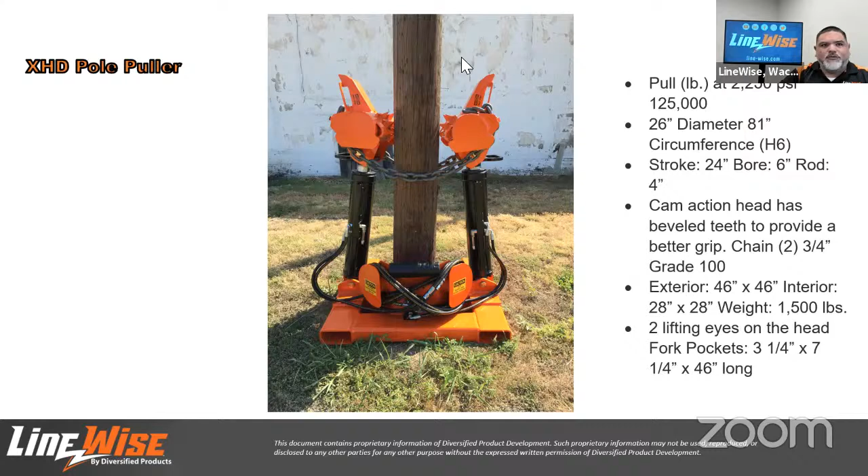High capacity pulling poles up to 26 inches in diameter. The XHD pole puller can handle a class H6 95-foot pole.

So we talked about the heads rotating in. We call them cam action heads. Essentially what happens, going back to the previous slide here, as this cylinder extends on each side, it's going to want to cause the heads to rotate in. As that happens, the chain gets tighter, which causes the heads to bite harder into the pole and not allowing the pole puller to lose grip on the pole as it's pulling it out of the ground.

There are some teeth that are in the pole puller head here. You can kind of see them sticking out more in this picture here, and a little bit right here. These teeth will bite into the pole as the heads are rolling over.

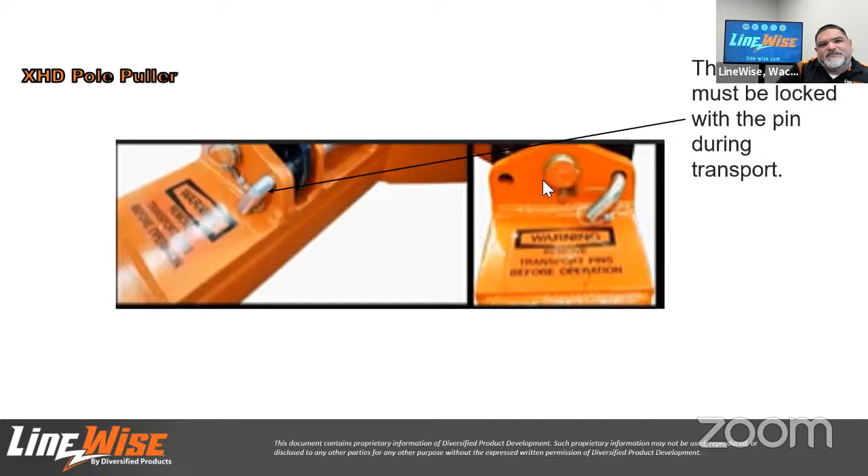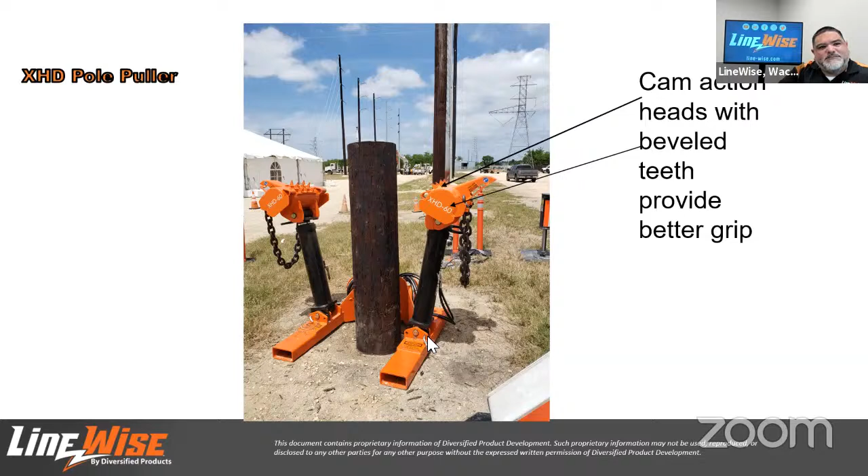The cylinders must be locked with the pin during transport. You can put this on the deck of a crane, you can put it on a trailer. I've carried both sizes in the back of my pickup. But you've got some cylinder pins here at the bottom that you put in place to keep these cylinders from rocking back and forth. Imagine if you didn't have these pins in place and you're going down the road and you hit a bump, or even down the right of way, these cylinders are going to want to swing back and forth. So this is why you put this pin in for transport purposes. Now this position right here is more of when it's being positioned around the pole. In transport mode, we'll see a picture of that later. This pin would be in this hole over here, or the inside hole.

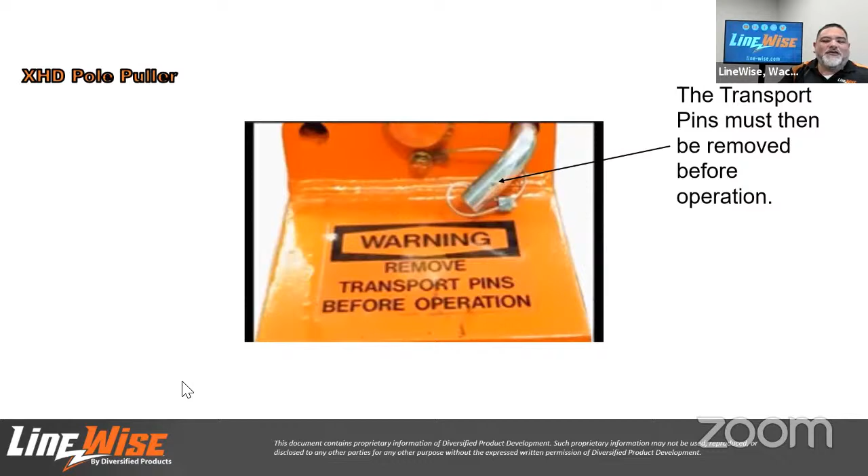This is here just showing you the warning to remove transport pins before operation. I've been around the pole puller quite a bit, and I was on a demo about two weeks ago, and standing there right before we started pulling the pole, I made it look like I knew that I had to remove the pin, but the pin was still in place. So that pin does have to be removed before you start trying to pull the pole. And that's what this decal here is trying to explain.

This is more of your transport mode here. Now the cylinders are rotated in towards each other. What you want to do here, as I mentioned yesterday in the webinar we did, is we could sell an outrigger pad that goes in the center of this to keep these heads from beating up against each other, or you could put a piece of plywood or something of the same material in between, so that as you're driving down the road, these heads don't beat back and forth against each other. Another thing you could do is rotate the heads back and then strap them away from each other. But whatever you can do to keep them from beating up against each other, that's going to help protect the heads of this pole puller.

One thing I just noticed right here, this black canister right here is the manual container. So if you order one of these pole pullers, you'll be able to find the manual for the pole puller inside that container there, strapped to the base of the pole puller.

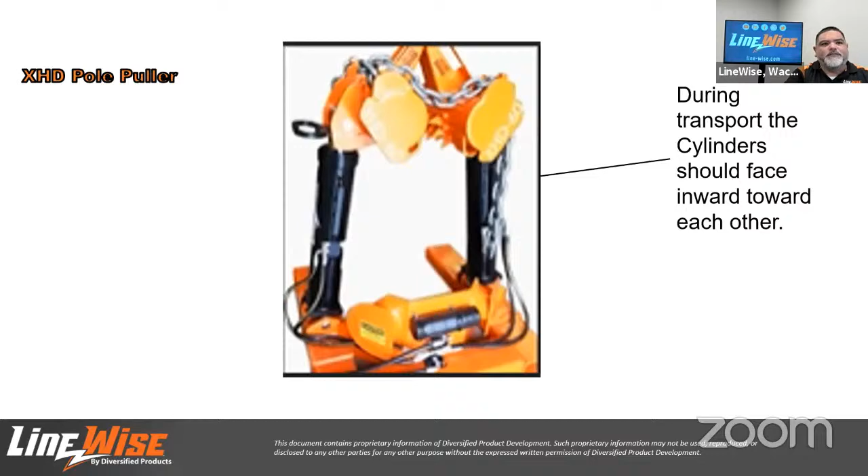Here's an example, this was actually an HD in this picture here. We said it's XHD here, but it really was an HD pole puller in this picture. This is on the deck of a line truck, digger derrick, as some people call it. You can transport them on the deck of the digger derrick and then use the load line to offload it and put it next to the pole.

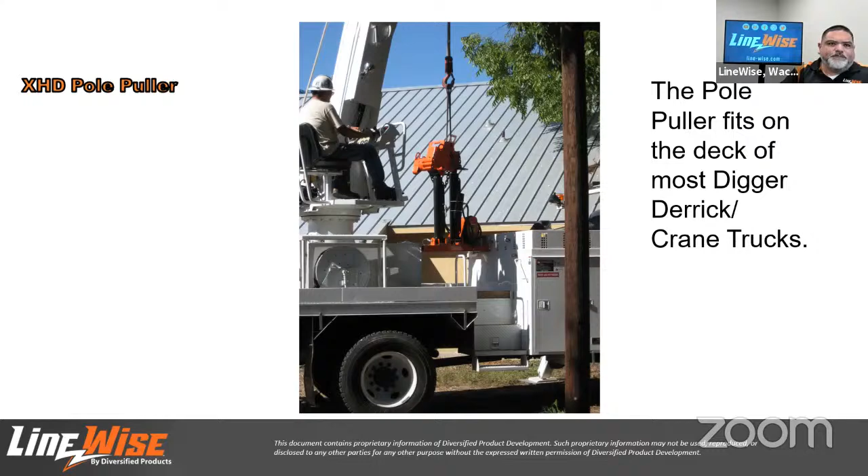Here you can see the lineman is positioning the pole puller so that the pole will end up between these fork pockets here on the bottom. Again, just because it has fork pockets doesn't mean it can't be lifted by the load line on the crane or digger derrick as we're doing here. But you can also use a skid steer. That's why we have the fork pockets at the bottom.

There's 25 feet of hose, I believe it is, on the pole pullers. So that you can use this extra length in addition to any length that's on the reel on the hoses on your digger derrick or your skid steer to be able to attach to that tool circuit.

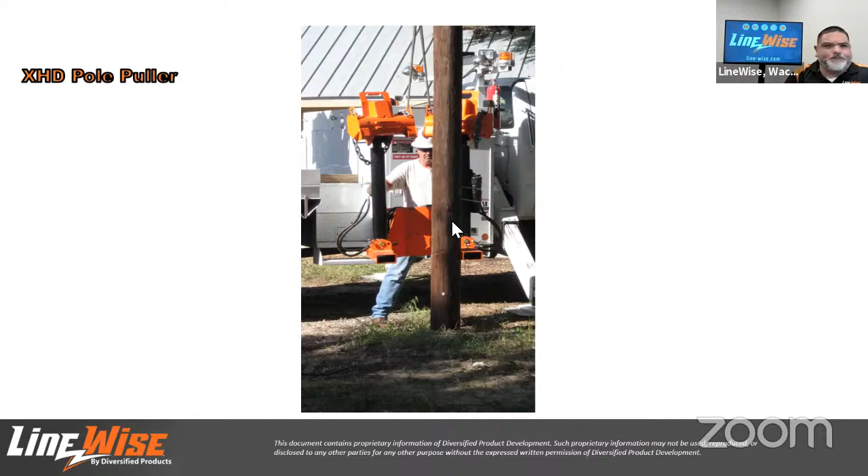Here you can see now the pole puller is now positioned in place with the pole in the center of the fork pockets on the bottom. Notice the chains have not been attached to the head on the opposite side as of yet. The chains are just hanging there.

We wanted to point out, as mentioned earlier when the video was showing, the base of the pole puller is much wider. You have a lot wider base to set on the ground. It's not just a single point of contact like a single cylinder. The single cylinder is going to have a much smaller footprint and it's going to want to dig into the ground, as we'll see in the video here a little bit later. But with the wide base of the pole puller on all three models I mentioned at the beginning of this PowerPoint, they have a much better chance of pulling the pole out because it has more ground force to push against.

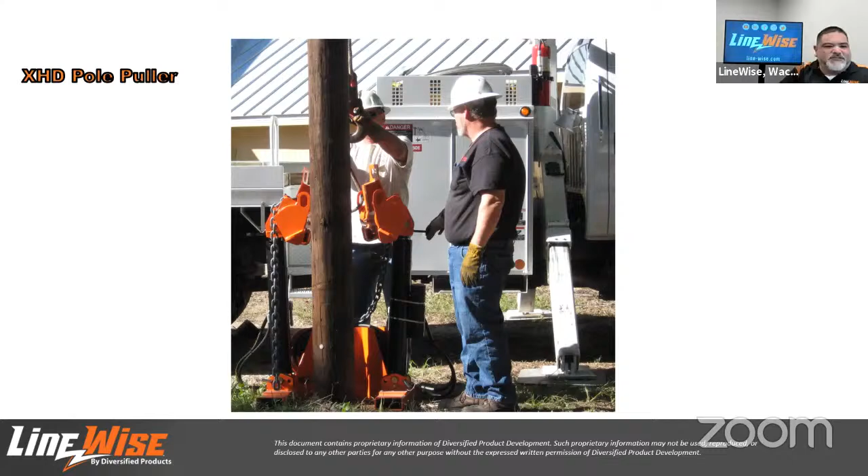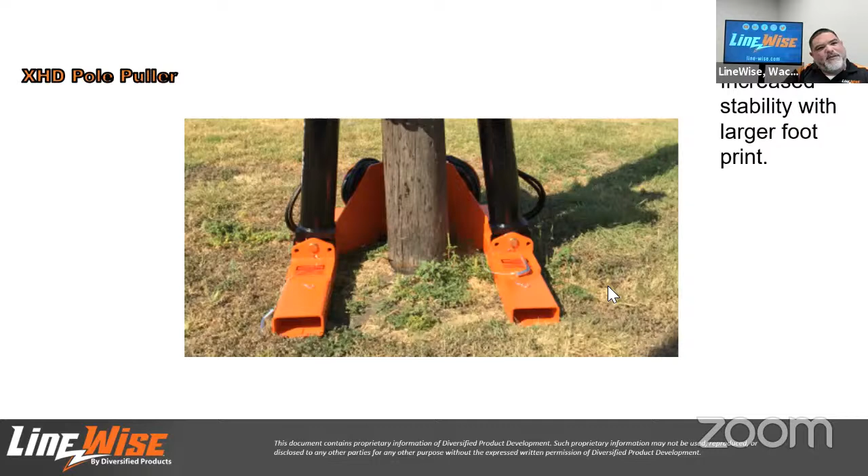So that's what this is showing here, more clarity that it is a wider base. Some people have asked, what if you're on an incline? It still works the same. Dave Packabush and I were out on a demo some months ago, maybe over a year ago at this point, and I remember we were on somewhat of an incline, and what they did was put some cribbing underneath one side of the pole puller, and it worked just fine.

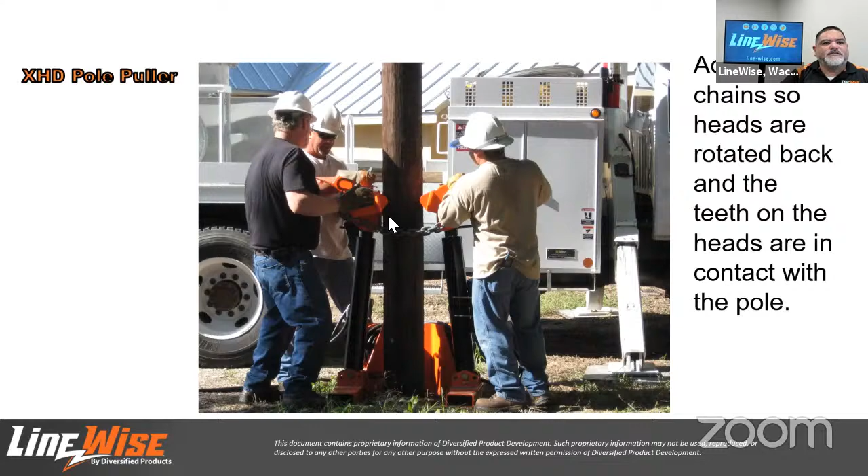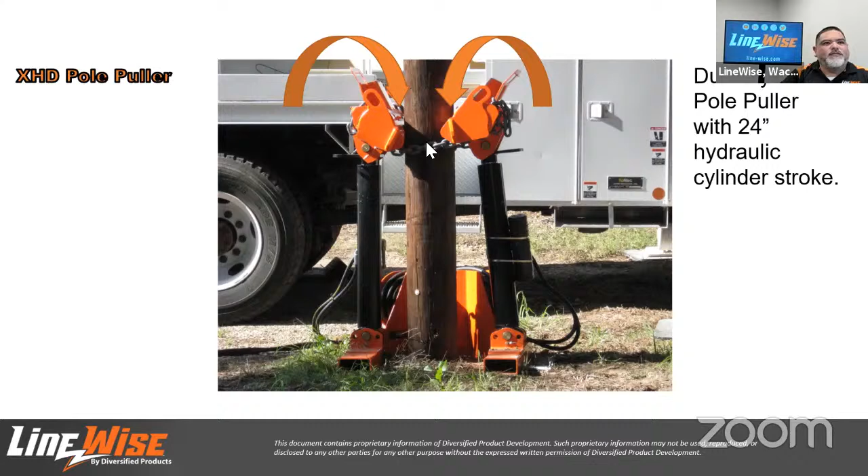Notice there's no pins in the hose down below, as previously stated. Here, this is just reiterating that the heads are rotating in. Notice that there's no slack whatsoever in the chains now, that the cylinders have started to extend and the heads began to roll. The slack was removed from the chain.

Here again the cylinders continue to extend. Notice that one of the cylinder rods is out further than the other. Some people, when using it, have asked, well, is that a problem, or why don't they extend the same? The reason is because there's no equalizing valve, or whatever the correct term is, to keep them coming out the same. Really, quite honestly, there's no need for it. Once the chain tightens up and these heads are biting into the pole, it doesn't matter how much this cylinder is out versus this one. Now the grip of the heads on the pole is what makes the difference. As this head goes up, it's going to pull this one along with it. So there's really no need to do that.

On a couple of occasions where customers are just adamant about the cylinders being the same, we did some special stuff there, but why pay the extra money when it's still going to work the same?

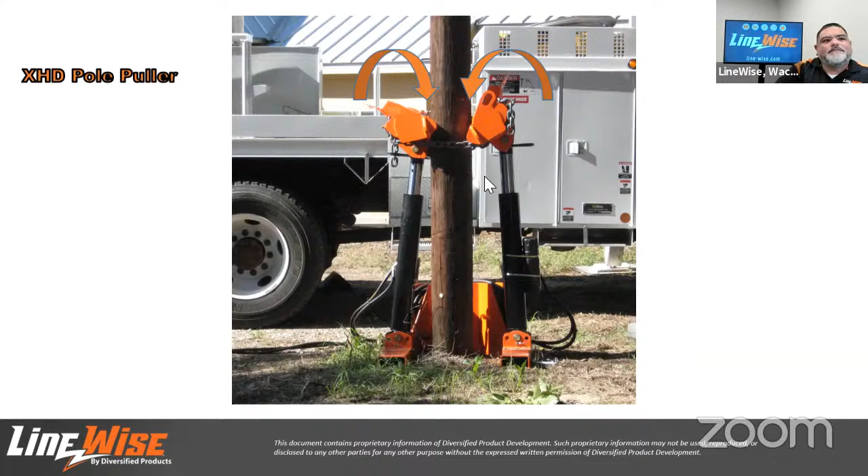Here you can see the cylinders fully extended at this point. Notice how, again, the cylinder on the right is out further than the left, but it still pulled the pole out of the ground.

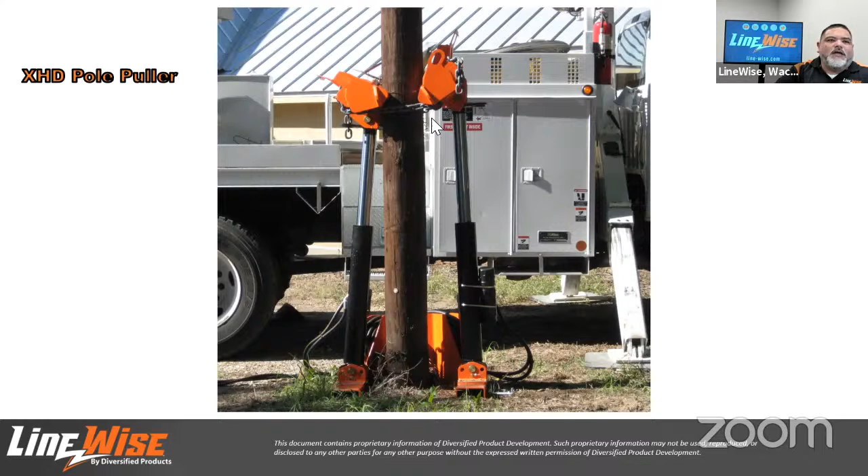At this point you can see the pole is completely removed. One of the things I didn't get to in the video today was that it shows the pole comes straight out of the ground. There's no moving the pole back and forth, making the hole in the ground bigger than what it needs to be. At one particular utility I was at, they said they really like that feature because it allows them to reuse the hole the old pole came out of. Sometimes they're pulling the poles just to put a taller pole in there, or maybe something else is wrong at the top of the pole, but they want to try to reuse that same hole rather than dig another hole.

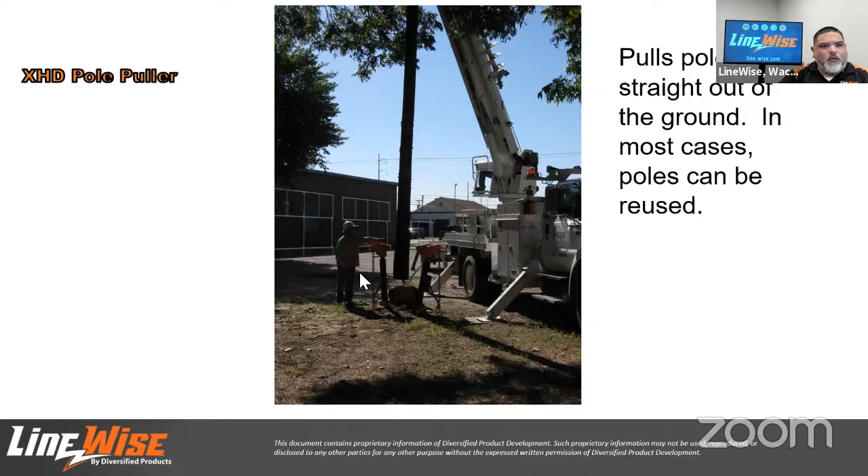So anyhow, that's showing it completely removed. The cylinder's retracted now and rolled back so that they can pull the pole out of the ground. Oh, where's that picture right here? It shows a clean hole here where the pole came out. This is a screenshot off of that video that we started off with today.

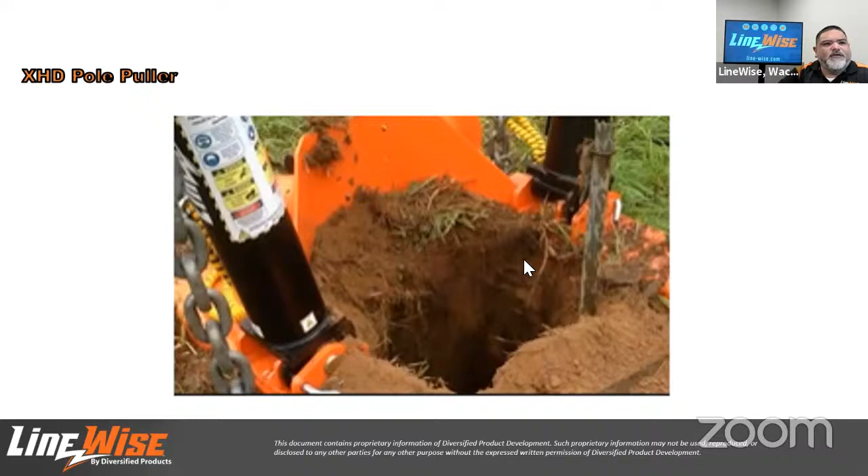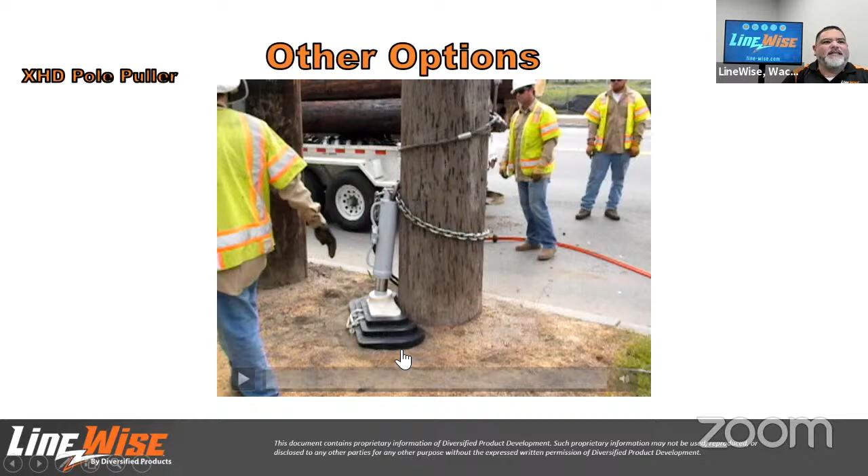Now here we have a video that we want to share. This is an example of a single cylinder pole puller working. This was somewhat of a modified version. I didn't mention this yesterday, but in general it still works the same way. The difference here is this particular company, a guy that worked there, came up with this extra base on here to have more ground to push against rather than just your basic foot plate for your single cylinder pole pullers. And this one here still has the same problems that your single cylinder is going to have.

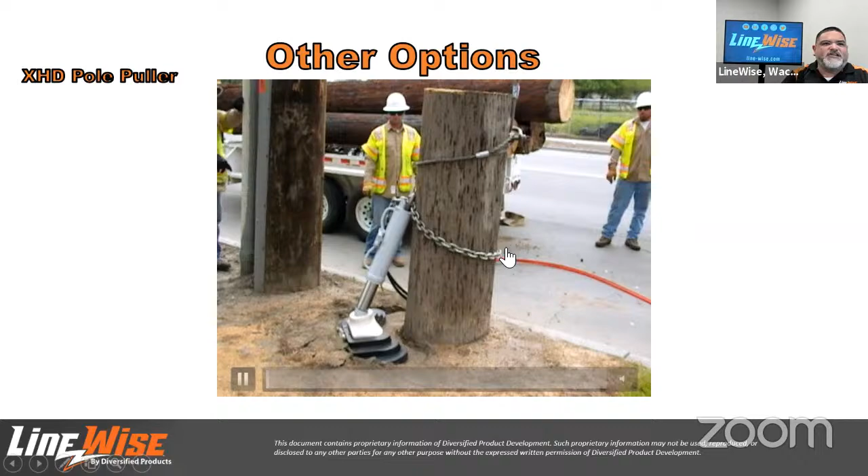So you can see here that in this version, like all other pole pullers, they used a chain to try to pull the pole out of the ground using the cylinder. Notice what happened is that it pushed away from the pole.

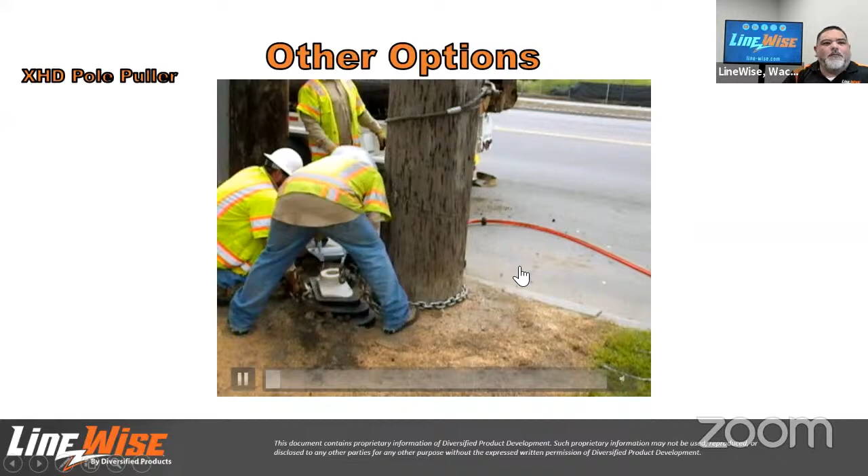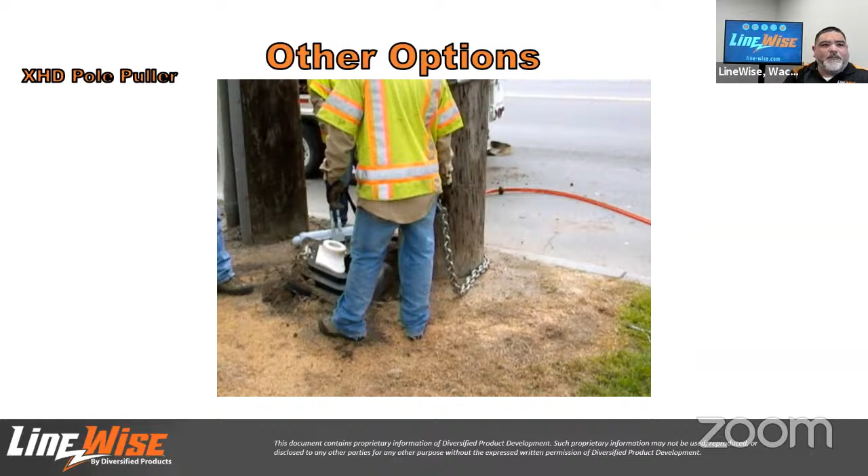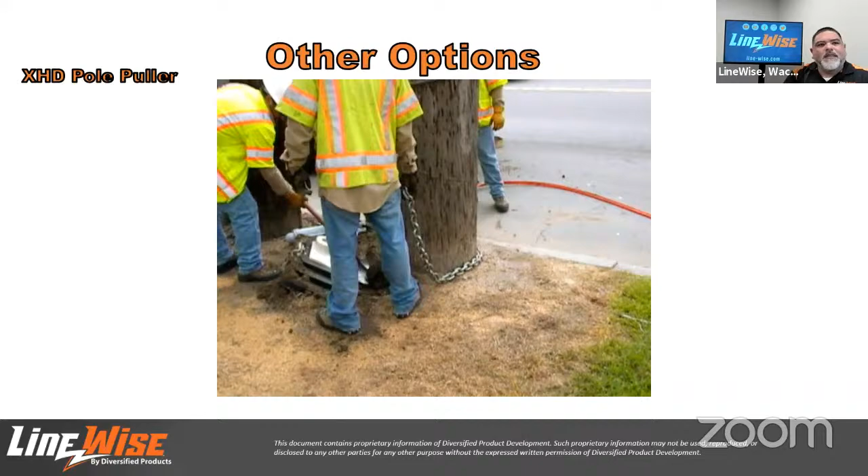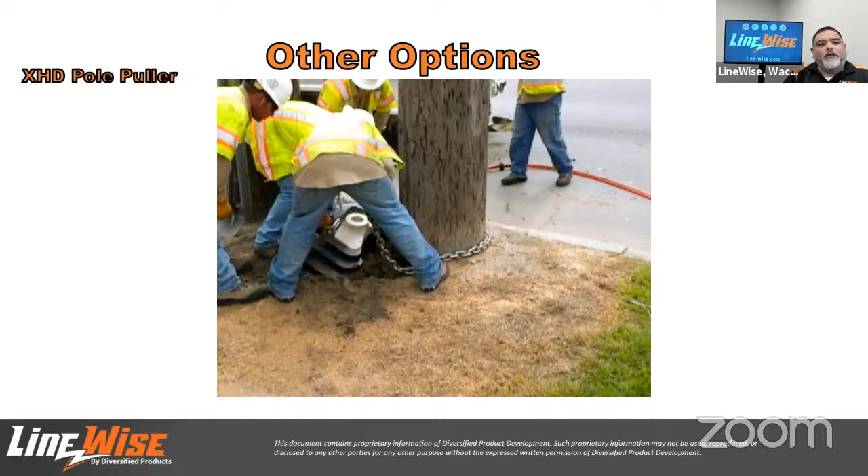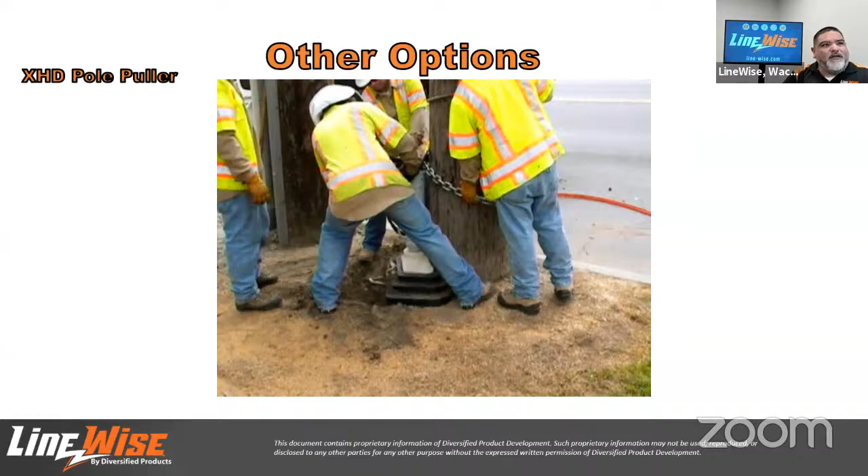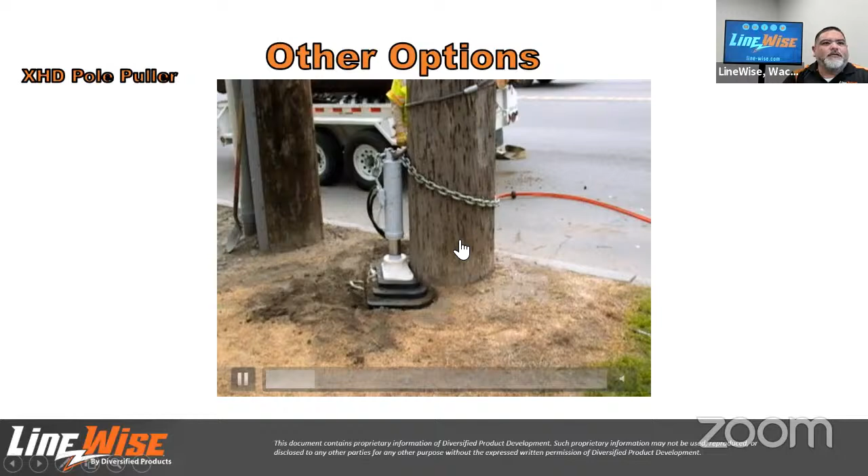There's a lot of reasons why people want to go with the single cylinder pole puller. Number one, price is one of the number one factors. For less than $1,000, is my understanding. I don't sell those single cylinder pole pullers, but it's my understanding they cost less than $1,000, and ours is going to be 17, 18 times that amount on the XHD. That's one of the biggest differences. But look at everything you're going to go through with the single cylinder versus the LineWise XHD pole puller. We'll cover that more later.

In this case, look at how this single cylinder is now pushing into the ground. Dave Packabush brought to our attention yesterday that what it's doing is compacting the ground around it even more, making it harder to pull the pole out. So it's working against itself.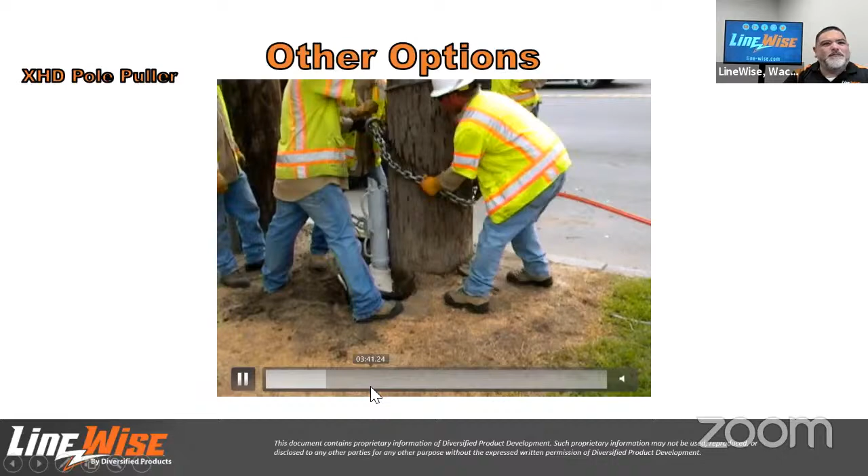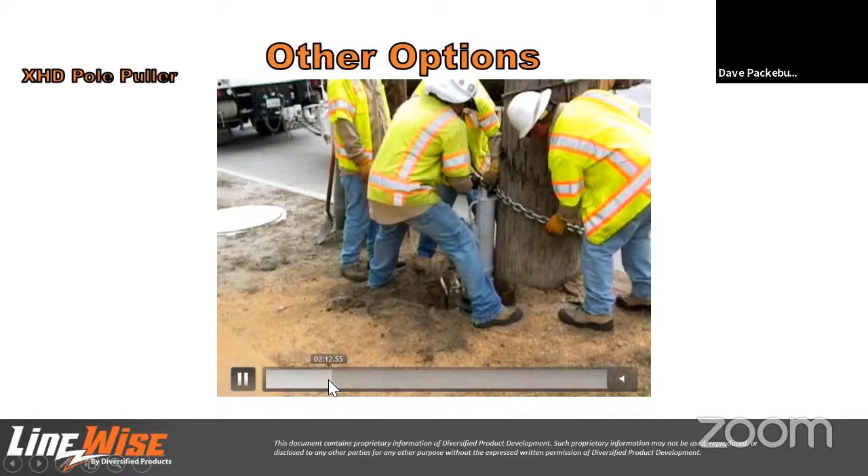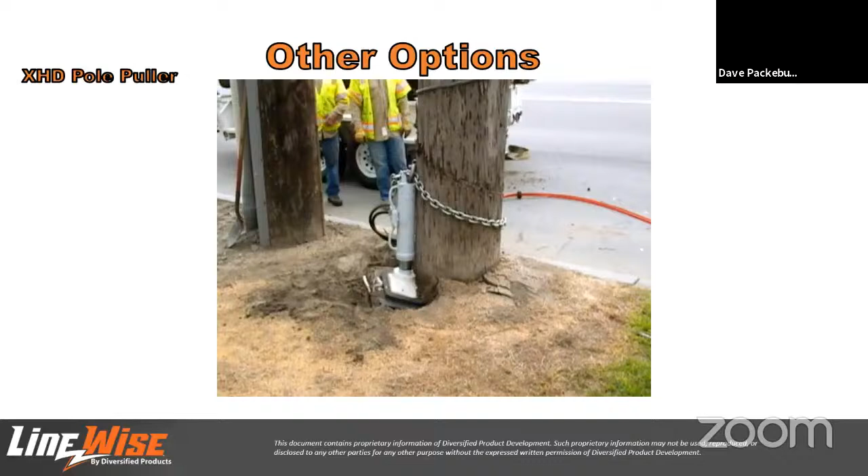Dave, anything else you want to mention about this single cylinder pole puller? The weight of having to move this thing around - the single cylinder is probably over 70 pounds, I know it's over 70 pounds. So you're trying to move this thing around, get it up to the pole, get it all positioned. If you're looking for hurt backs or on-the-job injuries, this is one of the ways to do it, with these single cylinder pullers.

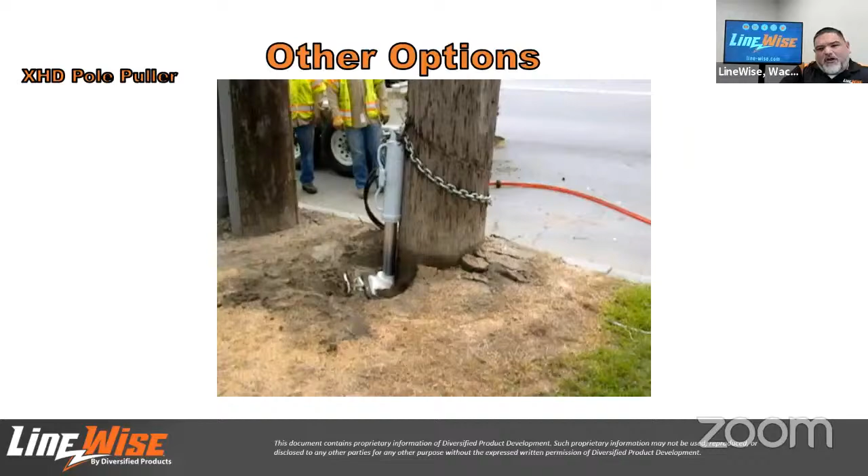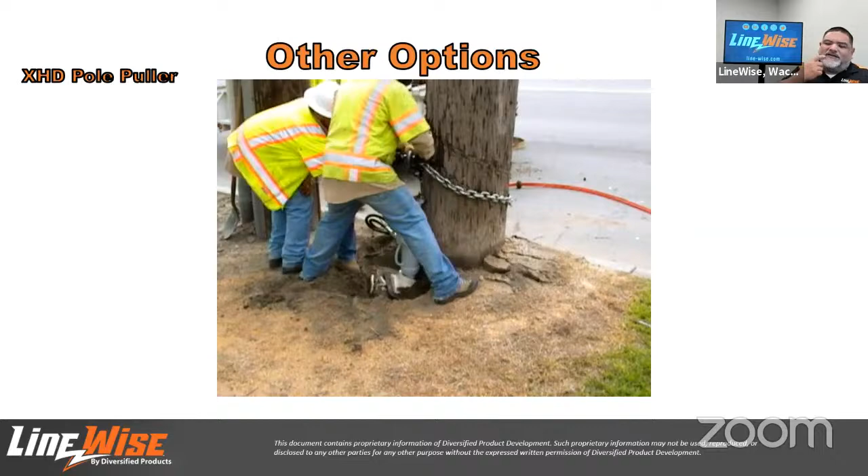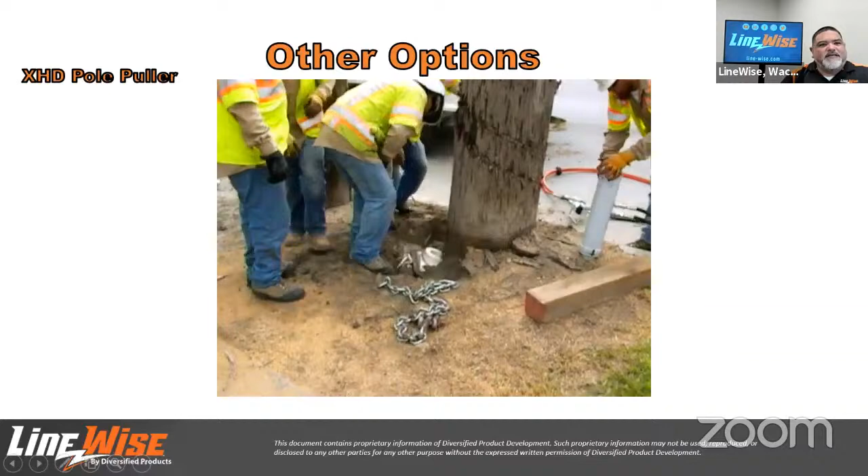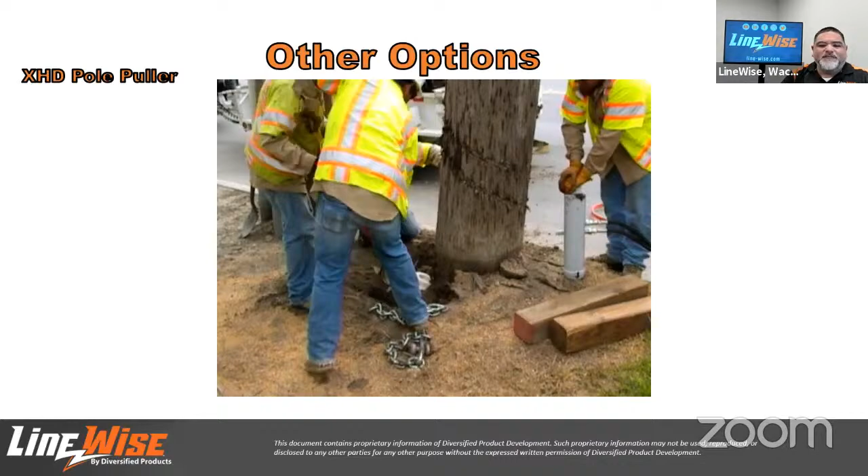That's right, I failed to mention that today. Very true what Dave is saying there, and I've heard that story many times. When customers come to us and talk about the pole puller, they talk about the experiences they've had using the single cylinders, and how they had different injuries from carrying them around - injured backs and shoulders and other problems. In the next video, we're going to see a way they've used a digger derrick to pull poles out of the ground, and how it caused damages to the digger derrick. In one instance, a customer called me and said he bought 2 XHD pole pullers, and had he just bought the XHD pole puller sooner, he could have saved more than what he spent on the 2 pullers, because that's what it had cost him in damages to his digger derrick.

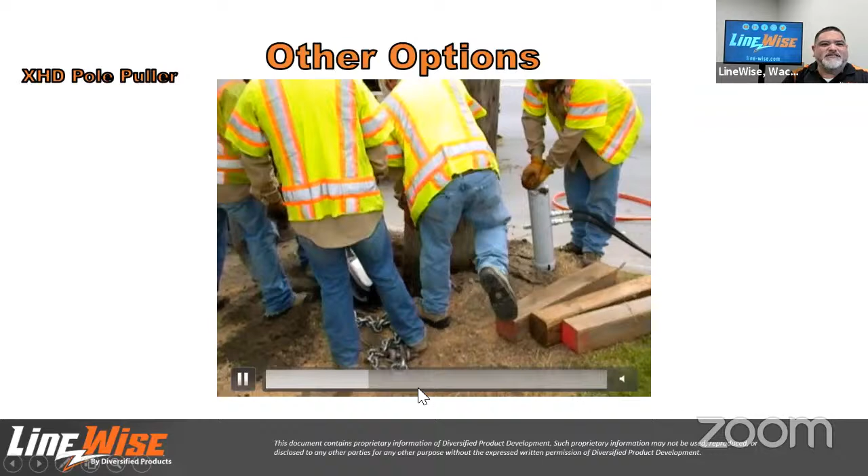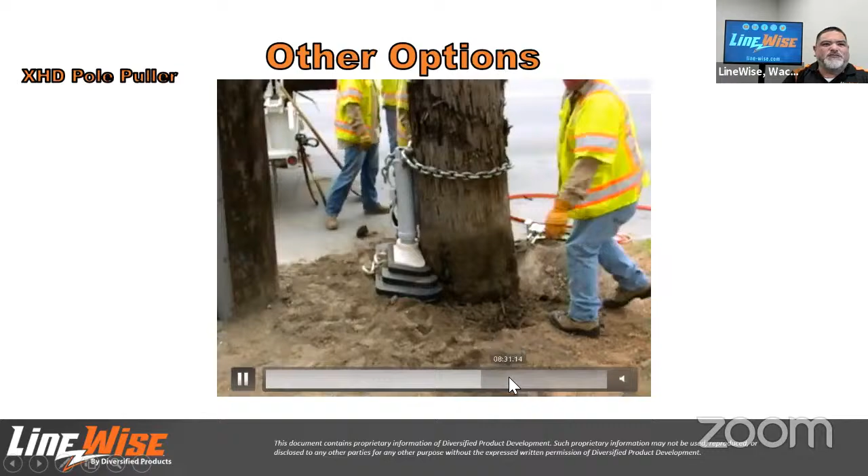I won't go through this whole video, but you can see there's a lot of work they got to go through, including moving it from one side to the other to try to get it to work. Now you notice the poles start going off to the side. It's just so many different reasons why this is a bad idea. Yet people do it all the time because it's the cheapest method.

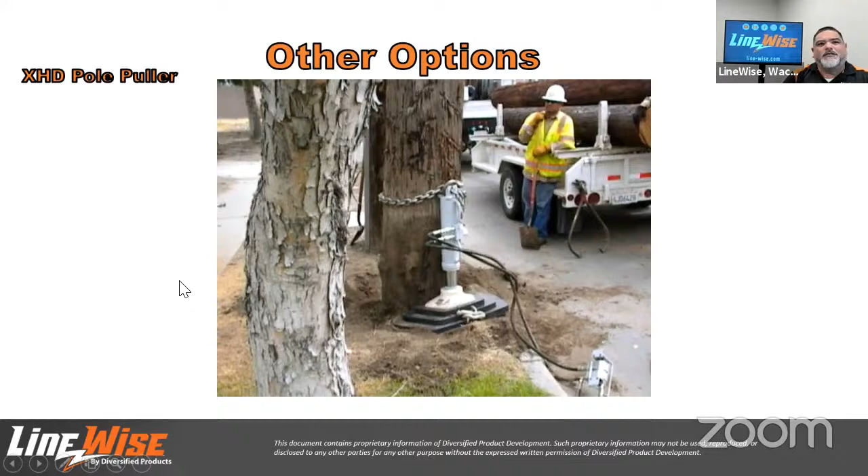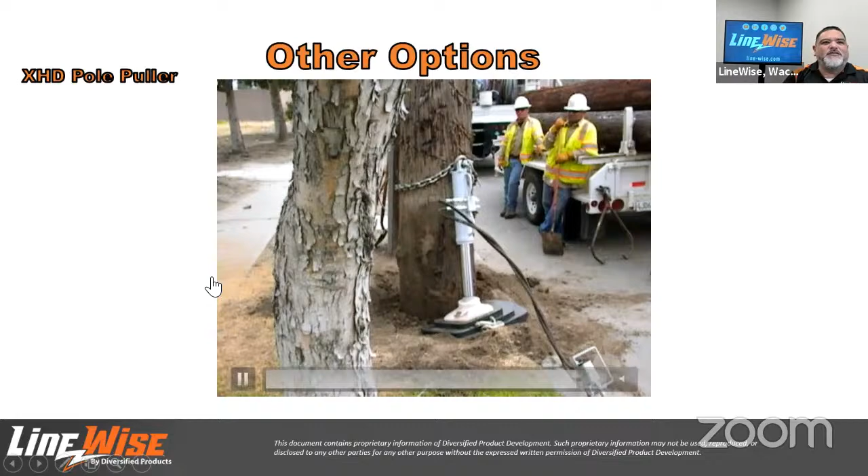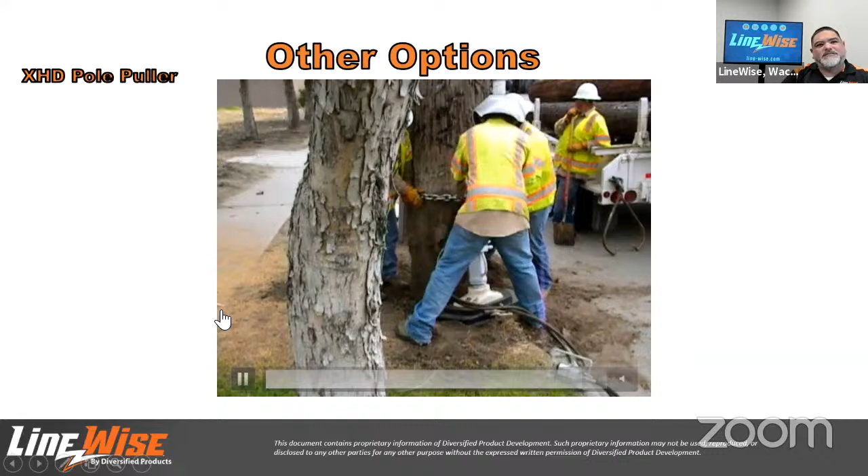I've been hearing this term a lot lately called work smarter, not harder. There's better equipment out there to be used here. It shouldn't just be cost driven - you're going to pay for what you get. If what you're paying for on these smaller ones is saving you money but getting your linemen injured, that is a bad decision. That decision should never be made that way, to save money over a person's body and injuries and things of that nature.

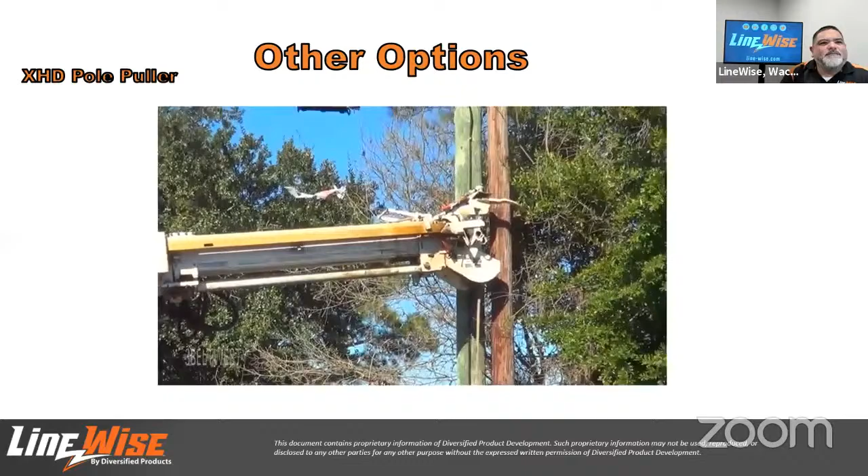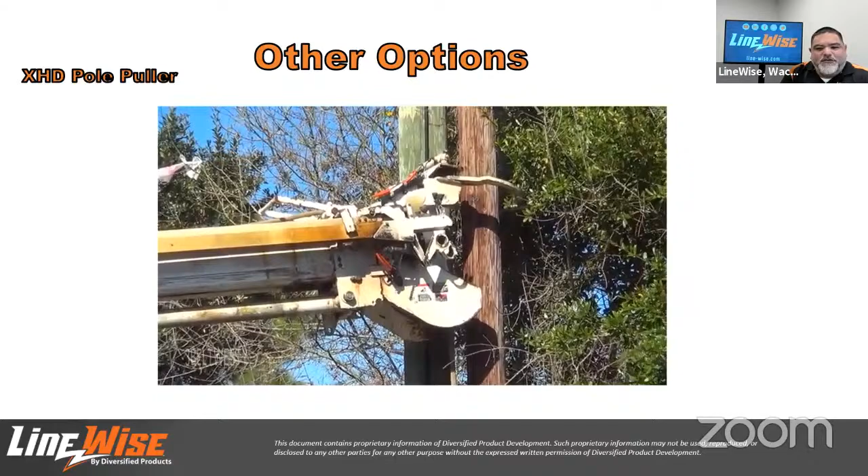On this next slide, you can see another video that shows where a digger derrick is being used to remove a pole. I was sharing a story yesterday that I was out on an in-service, putting a rotating basket by Diversified or LineWise into service, and that same customer had bought a digger derrick. The digger derrick manufacturer representative was there doing the in-service, and I remember hearing him say the digger derrick is not designed to pull poles out of the ground.

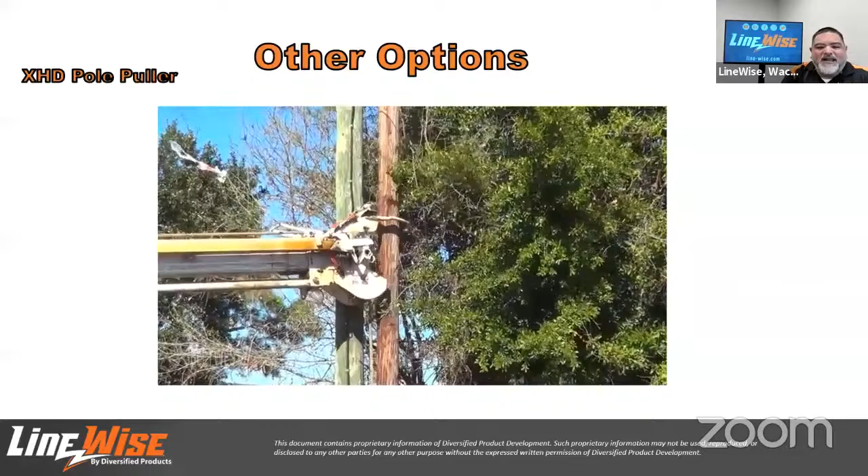He specifically said he's seen people grab a hold of it like you see here, and they extend the boom forward, then bring it back, go left, go right, trying to get it out of the ground, widening up the hole to break it loose.

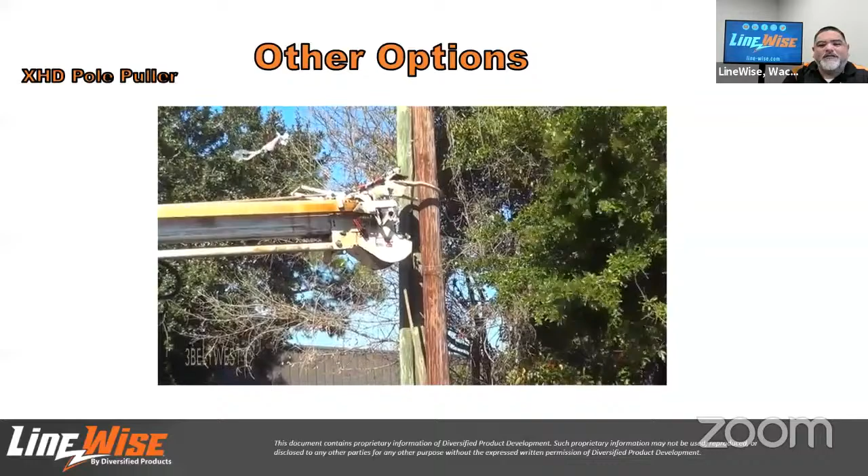Does it work? Sure it does. They do it all the time. The problem is they're not realizing what kind of damage they're doing or placing into the digger derrick.

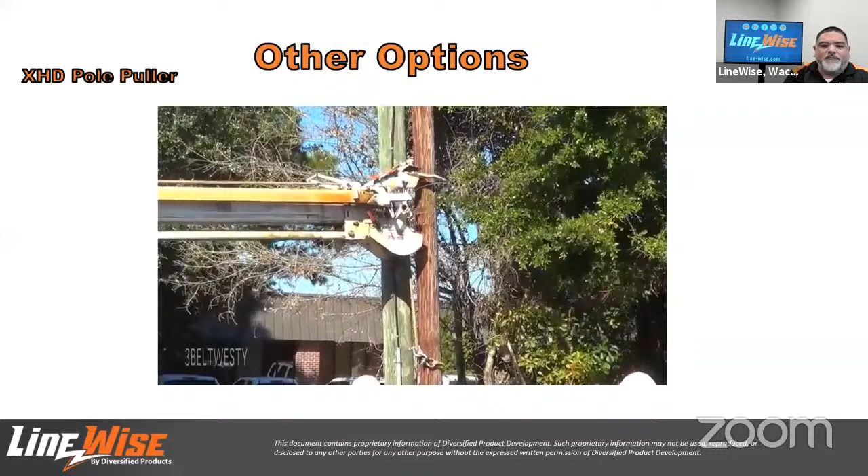The rotation gear at the base is not designed for this kind of activity, and it causes damage. The cylinders were not designed for this kind of work either. They're designed to simply guide the pole into the ground and raise it in and out, not to pull a pole that's been pressurized in the ground. Breaking that pressure with the digger derrick is not what it's designed to do.

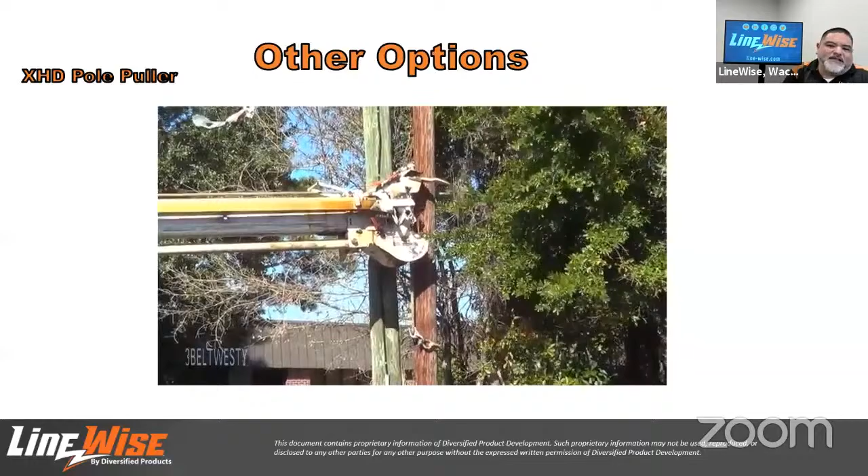Furthermore, some of these digger derricks have man basket options. Imagine they're doing all this damage to the digger derrick, and then they go use the man basket option on it. What happens if they go up in the air and this thing suddenly breaks off on them, injuring someone? Once again, this is another reason why you should use the proper equipment to pull poles and not risk the lives of the linemen and crews working out there. But that's what's going on here.

Eventually he gets it out of the ground, but we don't know what kind of damage has been caused here. This is just the video we saw earlier.

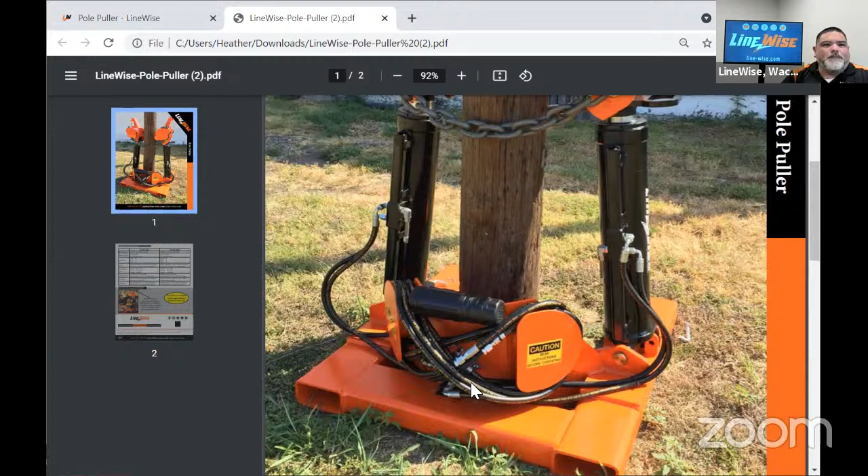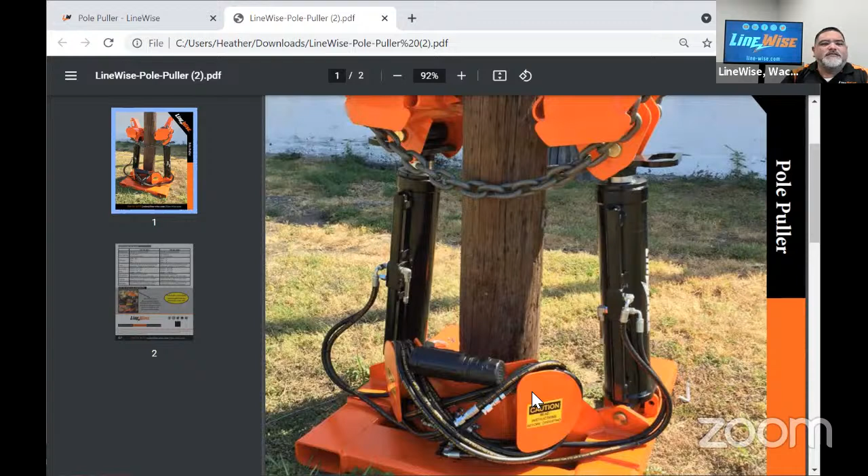Again, you can see the hoses wrapped around the back of the pole puller. There's a fork pocket so you can use a skid steer to transport it pole to pole if you're pulling a lot at one time. With the wide base, you can also use the heads here to lift the pole puller using the load line on your crane or digger derrick, and transport it on the deck of your crane, on a trailer, or the back of a pickup.

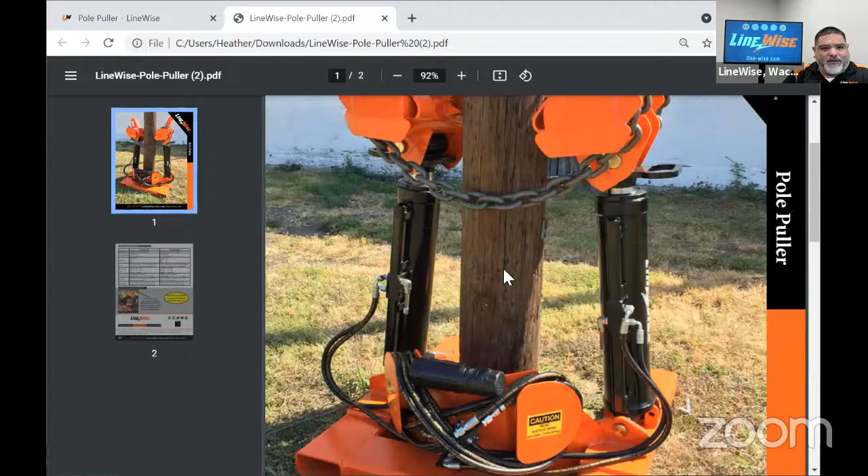Now I'm going to get out of this one and look closer towards the bottom. So what happens with the stub puller, if it's too close to the ground, is you remove the heads, the cam action heads we talked about earlier, from the top of the cylinders.

Then you install this stub puller device that bridges the two cylinders together. What happens is you take the chains from the stub puller and choke them around the pole itself, way down at the ground. When you start off, you may have to dig out some ground around the pole to get enough chain to choke it. Once you get there, you activate the cylinders, and that pulls the stub out of the ground.